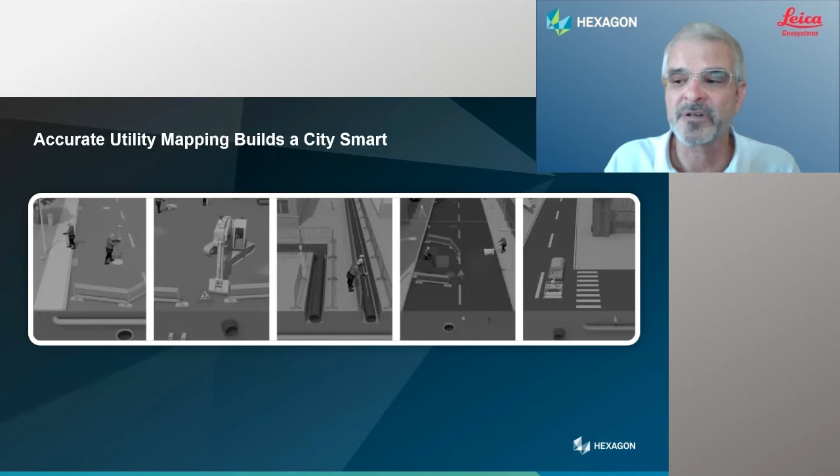So when we look at a smart city — what is a smart city? Contrary to what it may sound like, it's not a bunch of people with high IQs living in the same location. It's deeper than that. It's using the technology we have and sharing that technology. We may have the technology, we may be able to piece together this information about what is lying below the ground, but it's not until we start sharing that information with the general public or a developing city that we start making the city smart and using that data in a good way.

So we might use a tool like an EM tool, going around tracing a line in the ground and putting together this information, but turning it into useful information that can be used later.

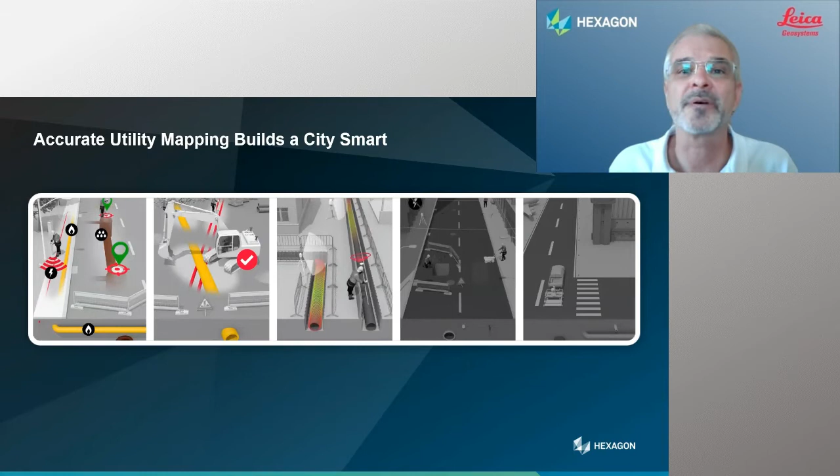And this is part about developing the city. It's also part about making a safe construction site when we can use these tools to identify what's in the ground, what's below the ground. Before we break the ground open, we know where and where we shouldn't be with the digging tool, with the excavator, so we don't have any issues here, because they can hurt us. It's also when we have an open trench, for example, before we bury the pipe, there are tools that we can use with our portfolio, with Hexagon. We can do above and below ground mapping. You combine this together and you know what's there before you close it up, so that you can build this map as you go and use it in the future.

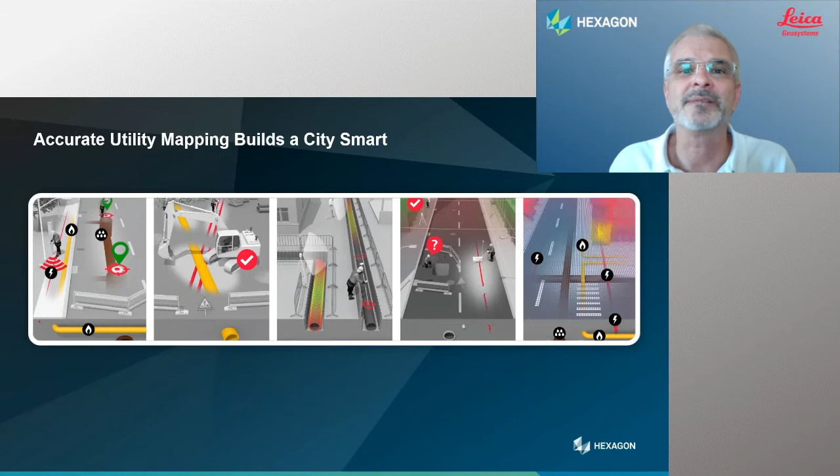Or if we're in an urban area and we want to see what's there, a number of tools can be used to combine this information together and develop something that we can use later on. And the other thing, it's developing so fast, and we'll show this to you a little bit later, but we also have the technology that can gather this information at speed. So when we're talking 35 miles per hour up to 90 miles per hour, you're capturing data this fast and processing it, back processing, but it's now faster than ever to use again. So this adds to the smart city that we are talking about, and it's then using this information to go forward to help develop that city.

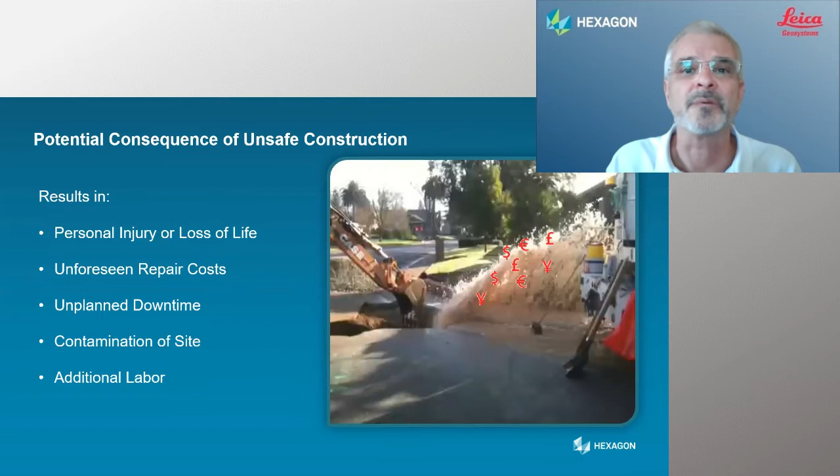So when we start talking about the tools that we have and how we can combine them together to make something safer, we can do that by combining a couple things here. So we now have an electromagnetic locator going through, looking for things in the ground, and we like to use this kind of workflow to combine the technology so that we don't leave anything missed. No stone unturned. We can go through, mark some areas. We use a GPR to go through, cover that area, and it's picking up bits and pieces, and you link them together with a sensing position device or a sensor, GPS, if you will. You can start getting a complete picture of what's below the ground. And then you can start using that right away on site by analyzing this information, sending it over to the operator of that machine to help avoid any kind of injury at the site.

And this is where the accuracy comes in. This is why we need to have the tools to be accurate, to be spot on, centimeters, 5 centimeters, right on, so we know what's there and what we can avoid. And I'll turn this quickly over to Steve, because he's going to take over and give you a little more about accurate underground mapping and some of the tools and techniques that we use in this area. Steve, if you would like to try to take over, and I'll give you possession of the controls.

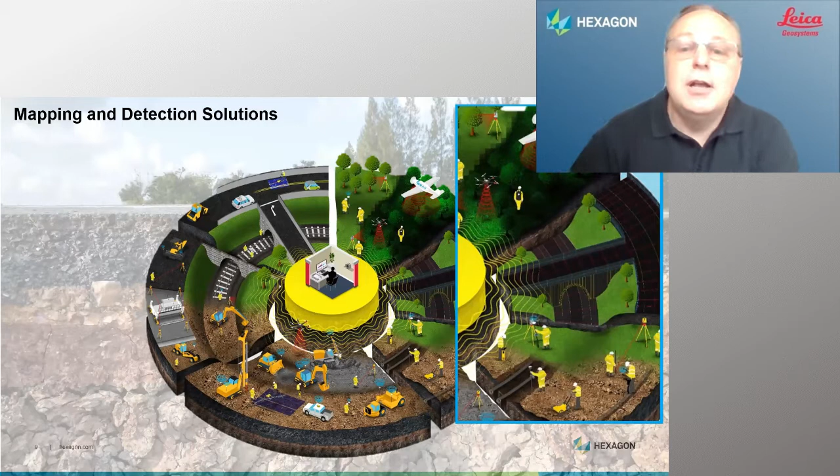This is a detection pie, and we use it in many of our presentations because it shows a complete picture of the available solutions that we have. From large-scale aerial photography to detecting buried infrastructure, from working within live construction sites, finding existing pipes and cables in the ground, and the things in between, which we call surveying. So whether these are below ground, above ground, or on the ground, Hexagon claim all three because these are things that are in our portfolio and part of our solutions.

So smart cities have as much, if not more, going on below ground than what we see, as opposed to the eye candy of the nice building. As Clint mentioned previously, to detect and map, we need to look out for these.

Leading on from Jeff, EML is electromagnetic locating, the process of locating using cable locating. You should all be familiar with these tools. But the reality is these machines find electromagnetic fields, predominantly found around pipes and cables. So we need to learn how to use the kit.

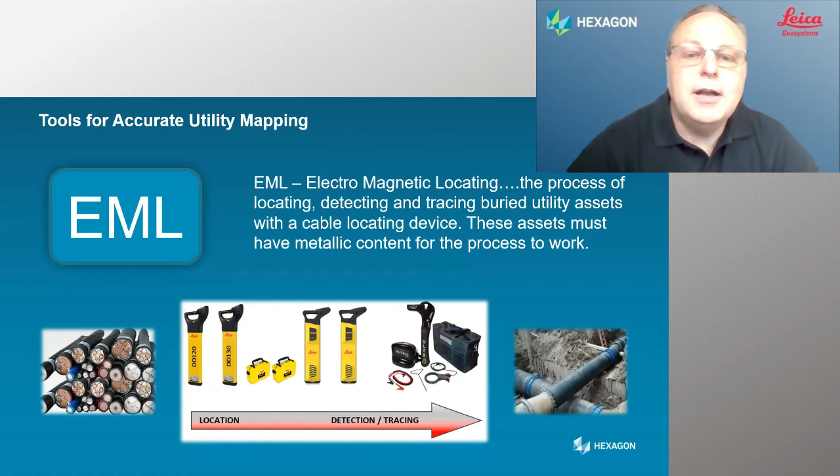GPR is a much more wide-ranging term. These are two terms that everybody uses, guys. We use GPR to describe one, a piece of equipment, and two, the actual technique for what we're doing - did we GPR the ground? This technology, GPR, is capable of detecting both metal and non-metallic objects, whereas EML is for metallic pipes and cables. It's up to us to gather the skill and knowledge to use it, unfortunately, as Jeff touched on.

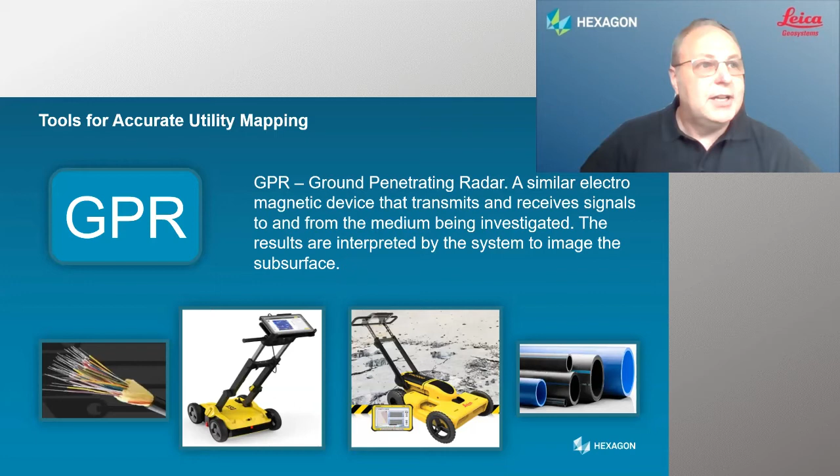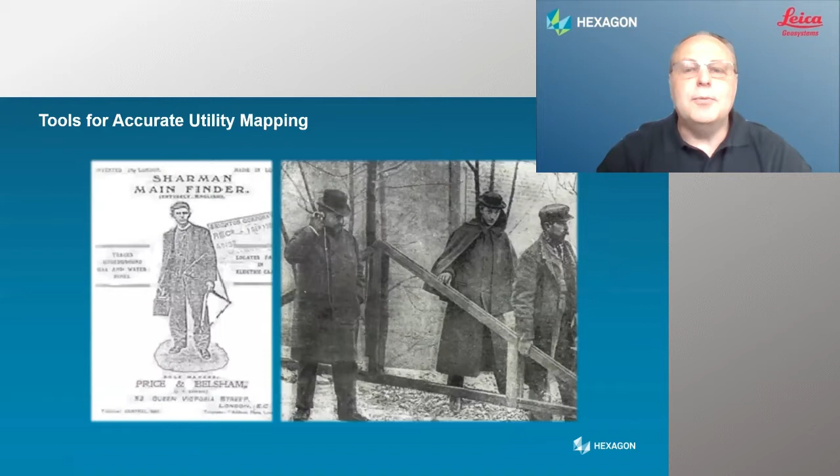So with those two out of the way, for anyone involved in the detection of buried assets, EML and GPR are the go-to tools - a little description on the screen there of what we've got. They've both been around for a long time, EML for around about 100 years, a little bit more, but the operating principles and theory of how and why they work really haven't changed. That's why we see old and new equipment models being used on work side by side.

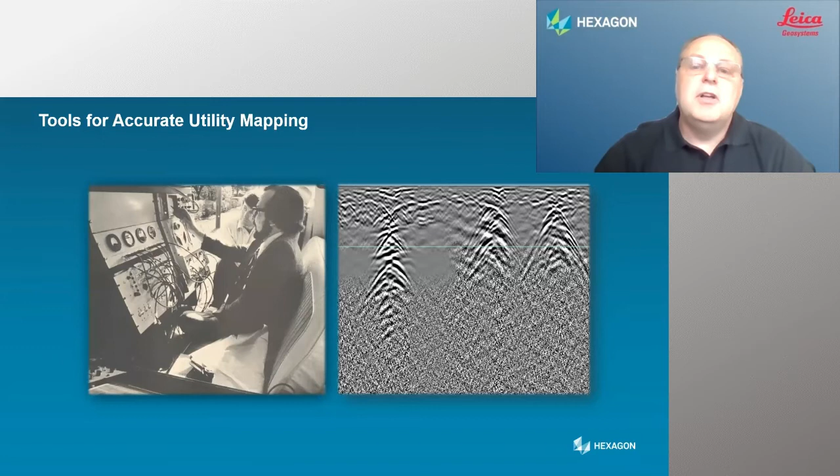They come in various shapes and sizes. On screen at the minute is the original GSSI radar, van-based, and some traditional radar data. Both are capable of collecting real-time, centimetre accurate positioning - not something just loosely mapped in satellite imagery with an accuracy that is really not good enough when we have to break ground.

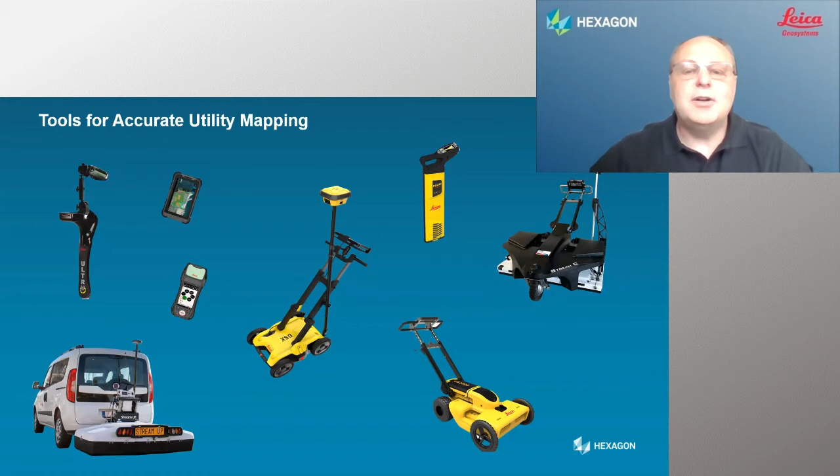Most people know about and are aware of cable locators nowadays, and their importance within the construction world. Not only for being able to find things, which is their primary function, but equally, and more than that, is safety - to keep people safe. GPR follows suit, and it should be used that way, preferably in conjunction with an EML device.

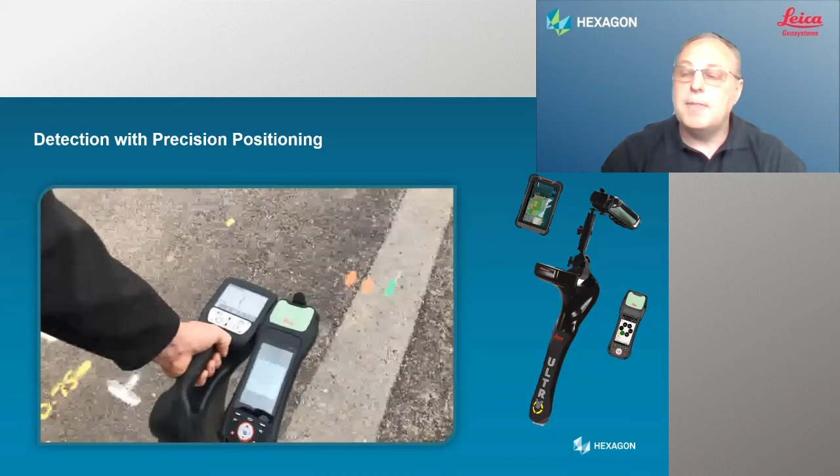For me, the site workflow starts with a locator. Naturally, existing pipe and cable record plans would come first, but they aren't always available, and neither is an 811 locator. As we know, there are many manufacturers of locators, all shapes, all sizes, and all colours, but they all do the same thing.

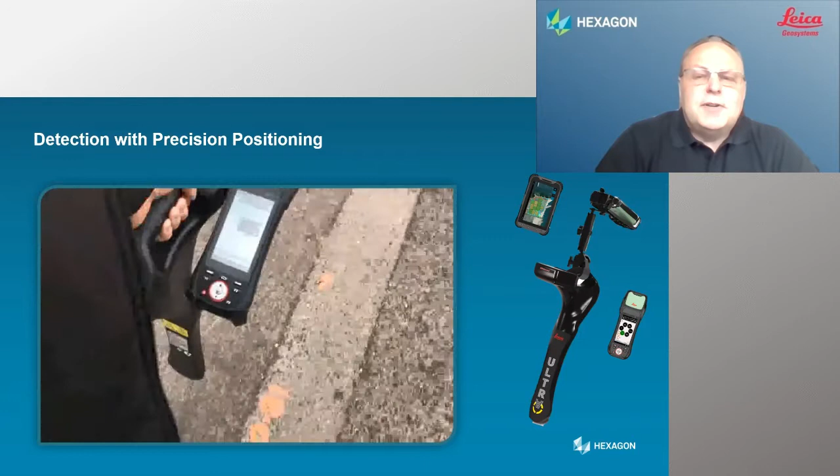For more complicated locates and in-depth surveys, we use a precision locator system, and with a little help from a GIS data collector, like on screen now, GPS centimetre accurate data is possible. On the screen, I was collecting to less than 5 centimetres accuracy when I was doing this. We currently use a modular system, as we know one size doesn't fit all in the locating world. So this type of system lets other manufacturers and users who want the ease and simplicity of RTK detection come to the party too.

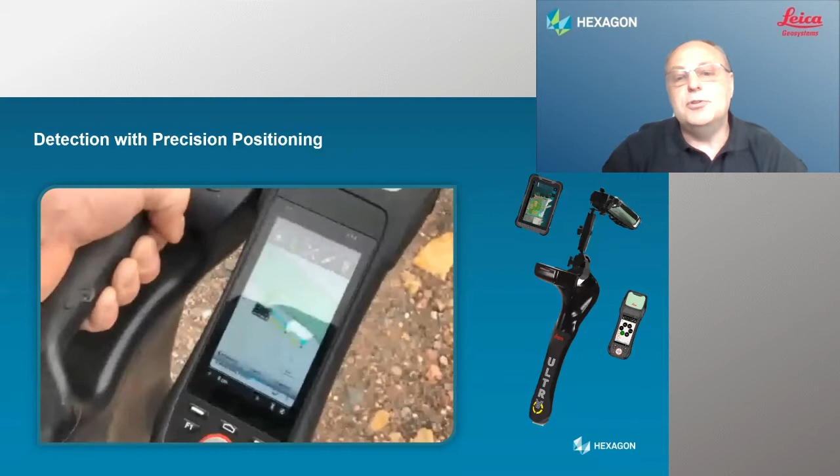This is a bolt-on system, guys - a simple pairing of devices, a small setup, and away we go. The system you see here is in the process of a simpler, smarter, more efficient revision, with a totally new solution coming very soon, so I advise you to keep your eyes open for it.

It'll be good. Output from the mapping app goes into the GIS platform, ArcGIS, where simple data conversion allows exports to the CAD modeling world with 3D attributes. So we mustn't forget that locator ranges, with all the usual accessories, are as important as the key components themselves, the transmitter and the receiver. We can add these accessories to the variety of tasks to make 3D data capture more accessible to everyone.

If we use EML, it's the ideal partner to any GPR task - it's a Batman and Robin, if you like, of the detection tag team. And it should be used that way, as a partnership.

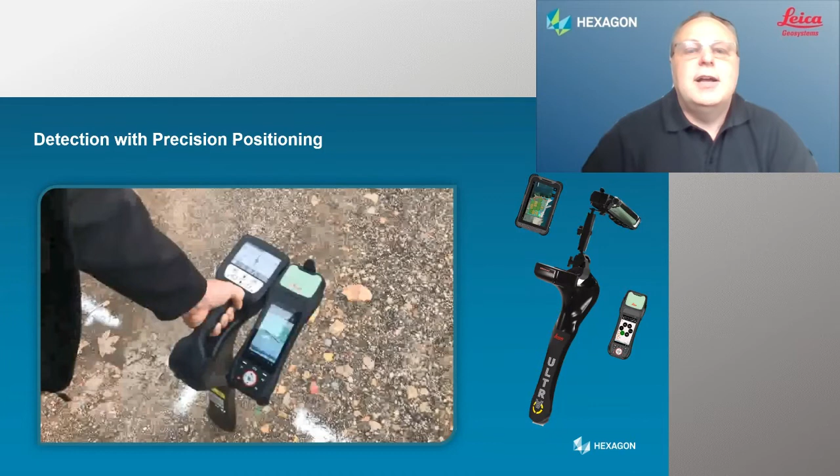I've been lucky enough to be involved in the DSX project, if this video will run okay. I've even had my own Hollywood moment in this video.

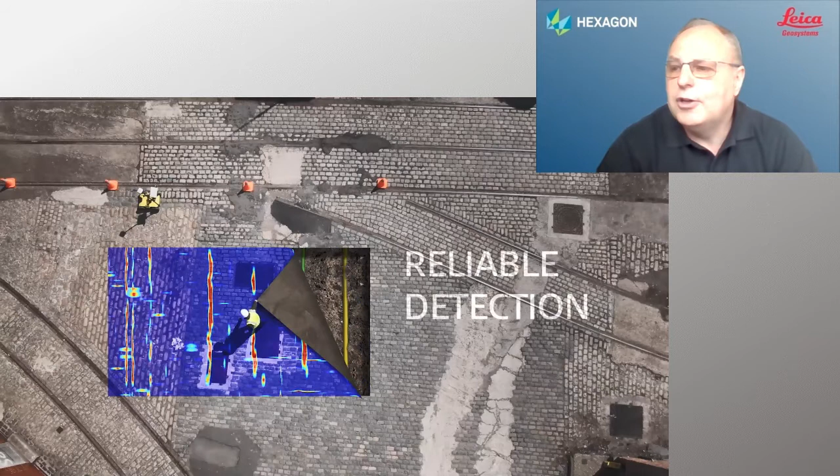This handcart system, with its all new software, is intuitive and now available. This means previous non-GPR or less experienced users can now get into the equipment and use it with relative ease and accessibility than ever before. Peeling back the layers and trying to democratize, if we want to use that word, the accessibility and availability of GPR. Take it away from, not take it away, but make it less non-expert.

I've used this system, I've used GPR for 20 years, guys. It's quite simple to use, does things very nicely.

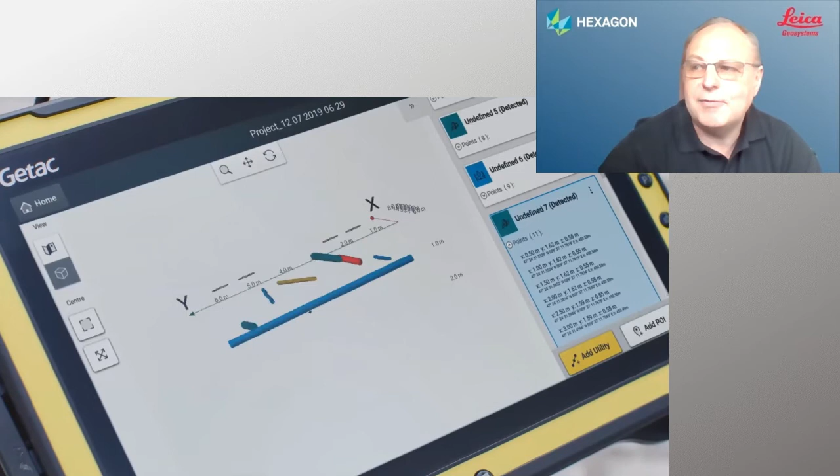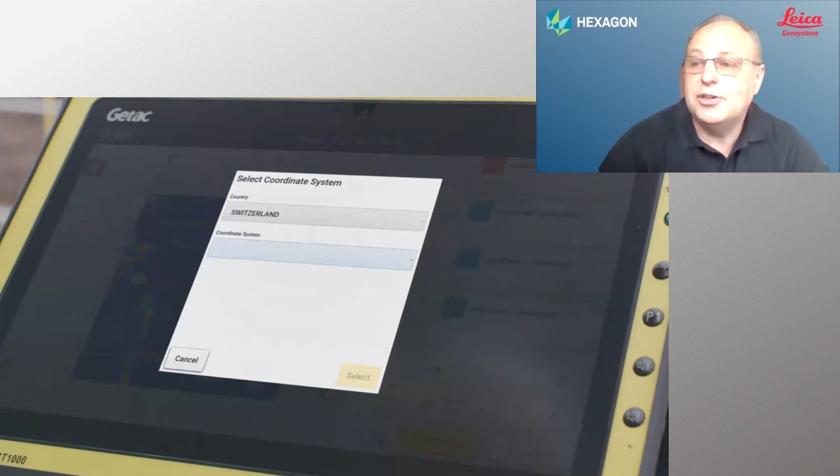As you can see on screen, we can get live 3D cube data. The machine and software do it all for us. The only thing we have to do is simply select the target, which is shown in high amplitude on screen. We can set coordinates to export. We can use it on any type of surface. As long as the wheels go around, that's us collecting data.

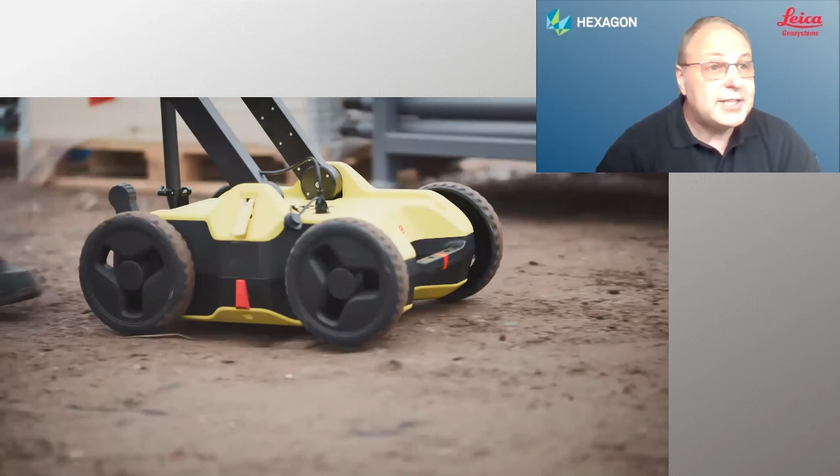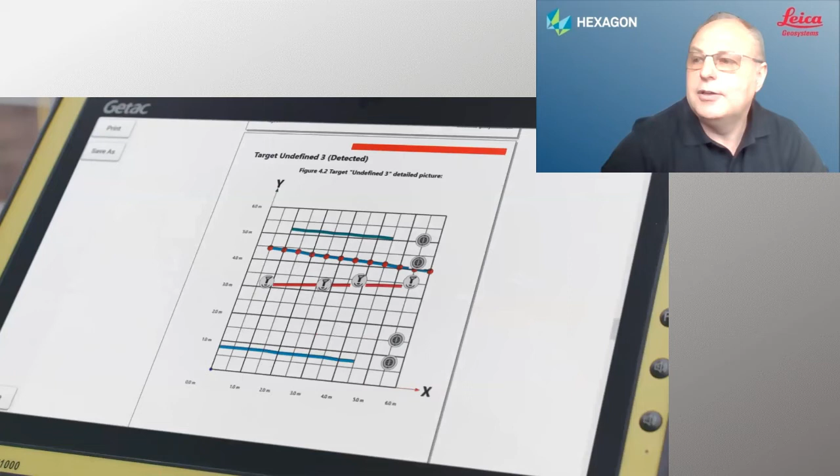We have onboard, on-site reporting: simple, planimetric, or data analysis. We can peel back the layers for any kind of construction.

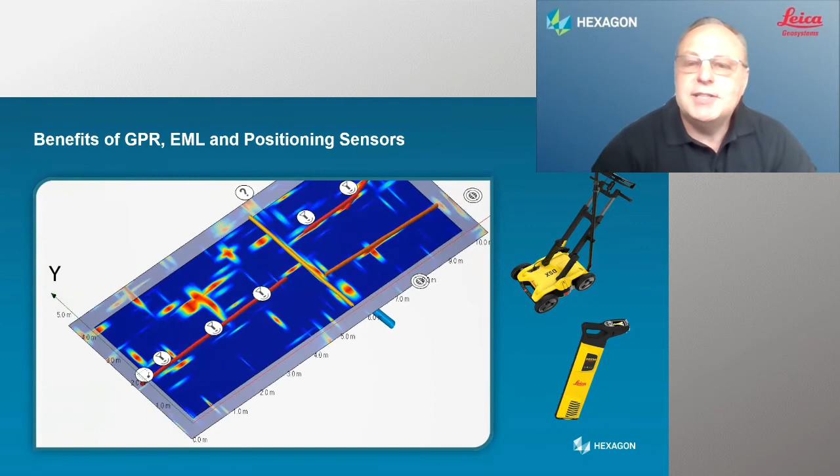So, ground penetrating radar, or GPR, or if you want to call it the dark art, it's always been a tricky process to pitch to the construction world. Thought of as overcomplicated and difficult to understand. Well, things are changing. They've changed already.

Traditional view of GPR data is replaced with a top-down view and slices through the ground. The unique operating software allows you to position EML detections within the data you collect on site. You can easily assign the correct depth elevation for the EML device, and for the first time on site, combined EML and GPR data come together in the same 3D live cube.

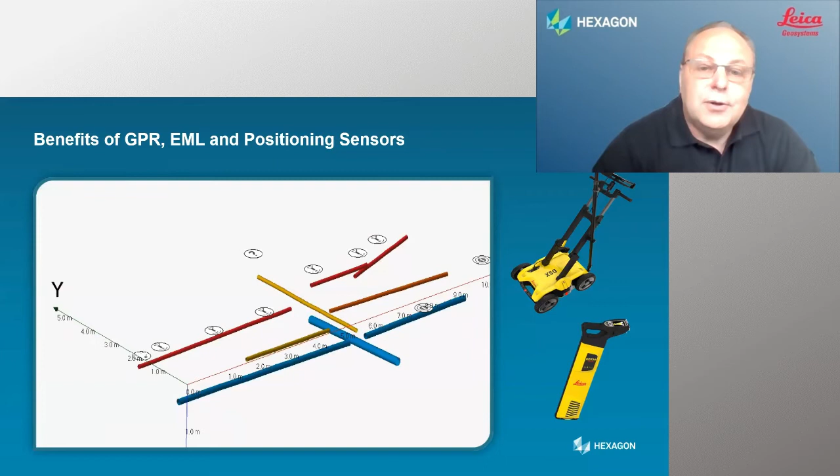This ability, with the intuitive and powerful detection algorithm for target analysis, gives the DSX the edge for simple efficiency. Add to this a GPS sensor for positioning, then all the data, including the EML information, inherits a true centimeter XYZ position. When used with the correction service, all available live on the worksite for the first time. The first time we'll see it in collection software, to be honest.

Other systems in the portfolio, Handcart Range, have a more traditional approach to how they do things, as you can see on screen. But the same applies, and you can still record everything on site, including EML, and assign true centimeter XYZ precision into targets, TPS, total station, or GPS.

GPS surveying, you just have to know how to get the best out of it. Sorry guys, but I'm a trainer, and that's what I have to say.

The multi-array antenna systems are perfect for larger area coverage, while the handcarts tackle smaller and maybe less accessible areas. The latest array, Clint's already mentioned this, is the new kid on the block, because it is. It brings the latest signal processing techniques for high-speed highway data collection.

All systems have positioning available to them, and all have 3D export and post-processing capabilities. The combined efforts of EML and GPR together get the best results possible. We use them together. And software, well, that's the glue that binds all this together, as the industry moves forward, taking ever larger steps day by day.

So take DXplore as the latest example for acquisition software, trying to keep us away from the hard and difficult interpretation. With the innovative process of Hexagon, we're ensuring cross-divisional collaborations, cementing the path to the future. The goal is to create a one-stop solution where the equipment, its firmware, and the software all seamlessly integrate with each other - quicker, smarter, and with greater accuracy and efficiency than ever before. Let's call it total mapping, if you like.

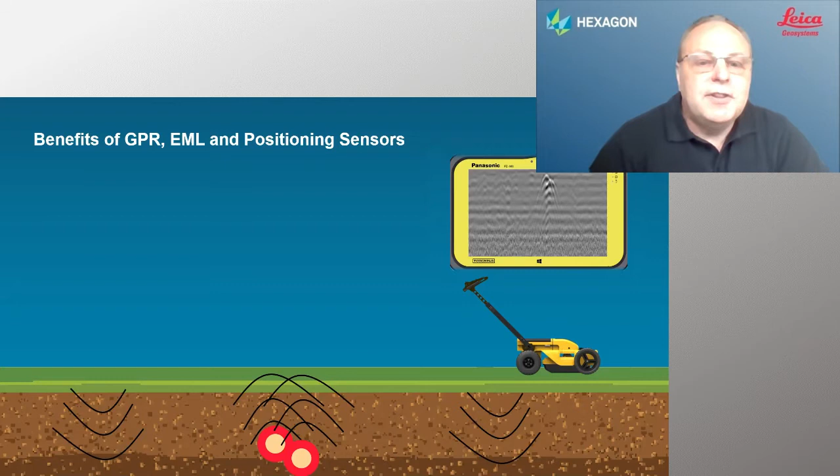So we have a lot of information so far. What I'd like to show you now is just a few of the case studies we have, using multiple different types of tools for mapping or detecting what's underground. Some of these cases are from the US, some from other parts of the world, but I think they paint a pretty good picture of how we can use these tools and this equipment to bring the unseen world to our fingertips, so we can have a better picture of what we have below.

A lot of sites don't have complete information. They may not have dated or up-to-date information, and you need to start putting the puzzle together before you dig, before you go into the ground, to see what just needs to be added to it.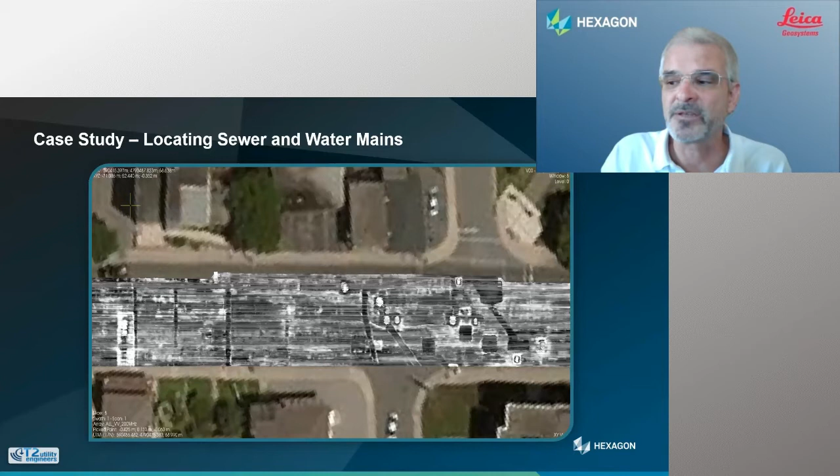So what they did is use a couple passes here to help identify some of the sewer lines or water lines in the ground to identify their locations. But then they also used EM to go through and identify some of the other utilities here in blue, red, and green, and overlaid them now on top of a single map so they could see the whole picture. I say now the whole picture because in this image you see there are some areas where the radar was strong, some areas where the EM was strong, and it's not until you combine these two together that we have a complete picture, a complete image of what's in the ground.

This is what's important here: we start getting a complete image, processing all this data and adding it together to give us a better view. It's how we look at this data, or how we want to use it to our advantage when we do future development or future studies. And it depends on what equipment you have, it depends on the software you're using. When you start collecting this data, it starts to add up, it starts to accumulate—you have a lot of data.

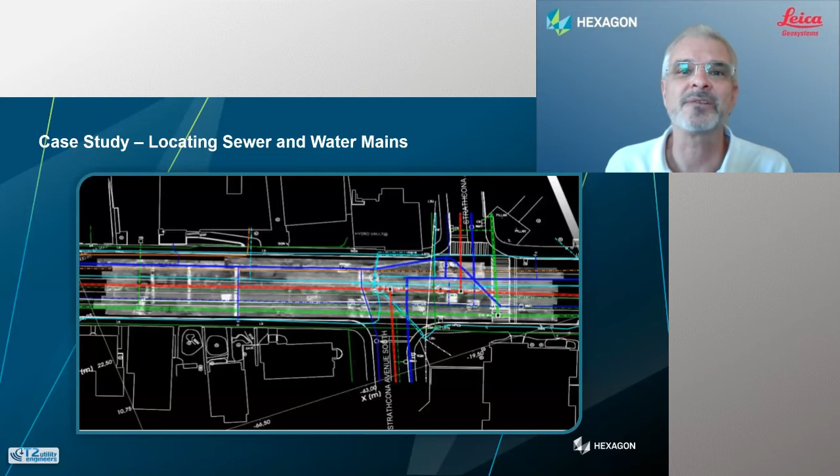One of the examples I want to show you now is one of the systems we've just released. It's not too long on the block here, and this is a Stream UP. It's something I'm sure Gavin is very familiar with, but we're starting to use the software here to make a complete picture. So if we look at an image here, when we start this video, we can see how this information is loaded, how it's starting to be pulled together so we can use it to our advantage.

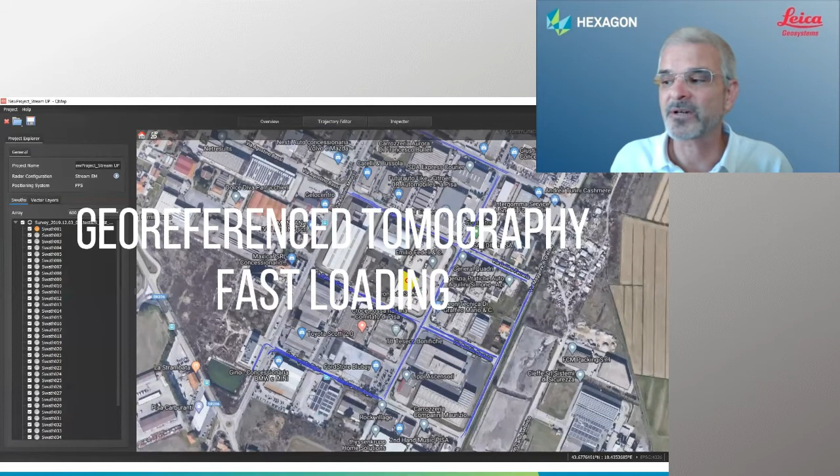So if we think about loading up a project that you'd maybe have to do back office, and you're starting to process the information, you can do this much quicker now with the right software, with the tools we're developing, to go ahead and start loading up an area of interest to where you want to see or combine what's above the ground with what's below the ground.

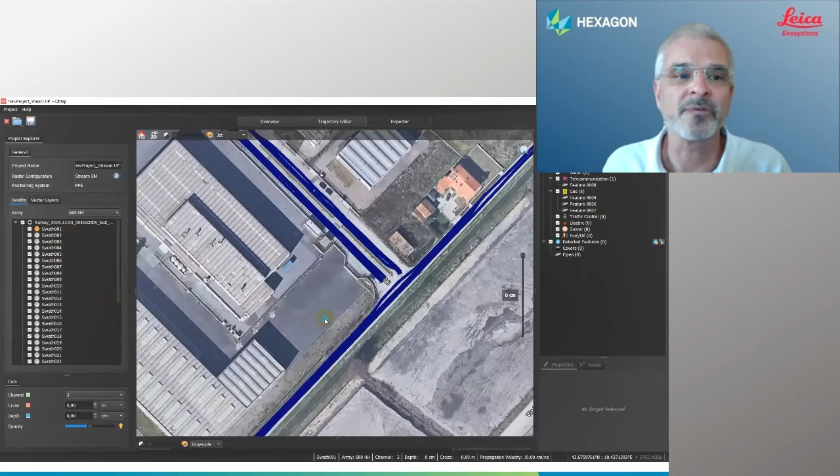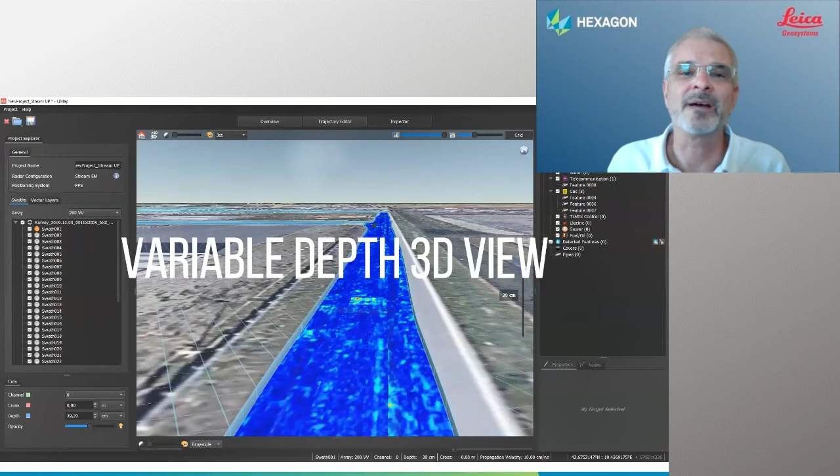In this example, you can see what we're finding in an area of interest. We're using the radar data that we collected, and I'll go again with the note that Jeff mentioned: we are doing some of this data collection at speed. This unit can go up to 35 miles per hour, which is what's recommended, but you can go up to 90 miles per hour and still create this information. You can create this 3D image to where you can now look at the data in a different way, something that's easier for us to visualize over vast areas.

This is a lot of information, and it's being processed at much faster speeds than we had before. This helps us get the answers we need in shorter time, to be more efficient and more complete with the data we're using.

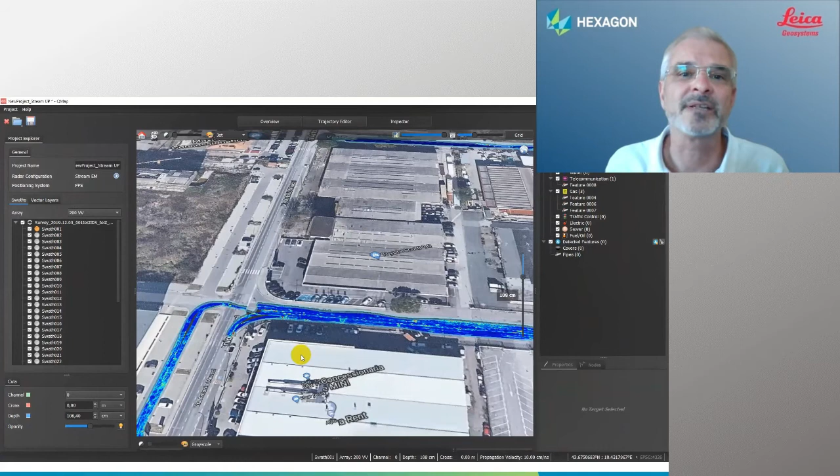These are the kind of tools we like to use. They're looking for utilities in this case, but the tools aren't just for utilities. It's for finding what's not there, or what's there that we don't see, that's not part of the utility, not even on a map.

When we look at the big picture, this is where this information really comes in, something we've alluded to already in today's presentation. You've got to be responsible for what's on the site, not only above ground, but on or below the ground.

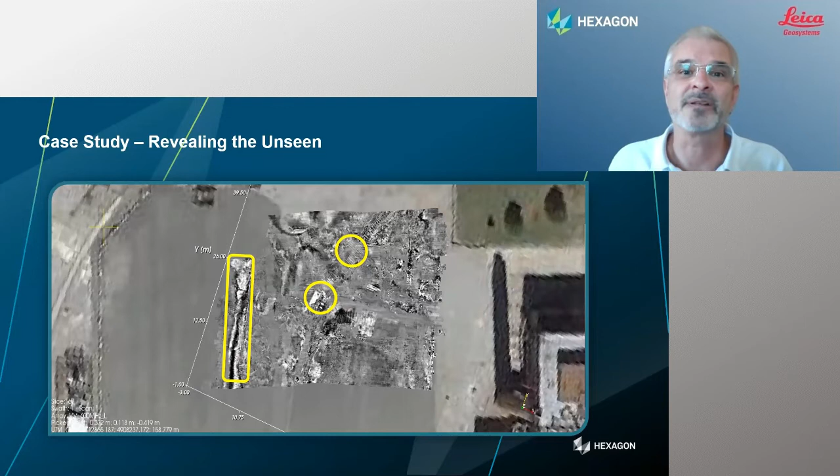When we look at it this way, you want to know what's below the ground before you invest in this piece of property or this ground, so you can have an idea of what you may be dealing with. You might want to find things out beforehand rather than later, and this makes a big difference.

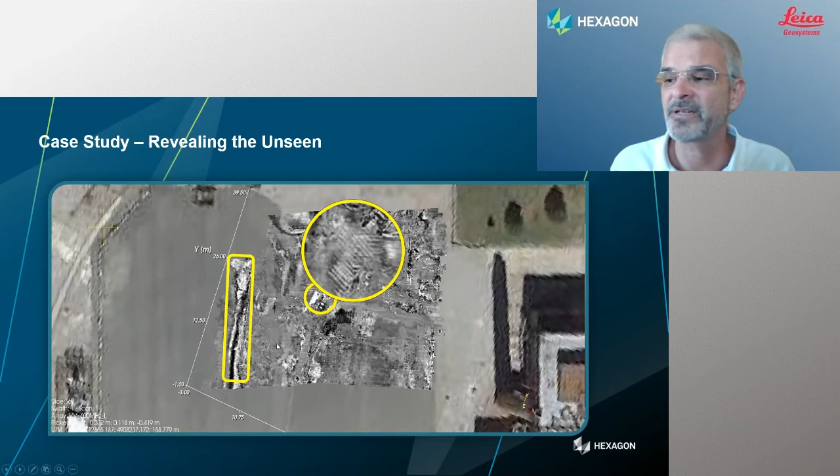Let me turn the screen to the right screen, how to do this again. You can see parts of the information here, but not all of it.

In this example, we used a push cart GPR mounted system with a GPS locator, combining positioning and radar to complete the picture. We're doing a pseudo array, a pseudo matrix, scanning to get the information we needed to see what's in the ground before going any further.

So when we start building this transformer station, we have the information we need. Again, this is combining tools, combining the things we need to get accurate mapping of what we want to see before we go any further.

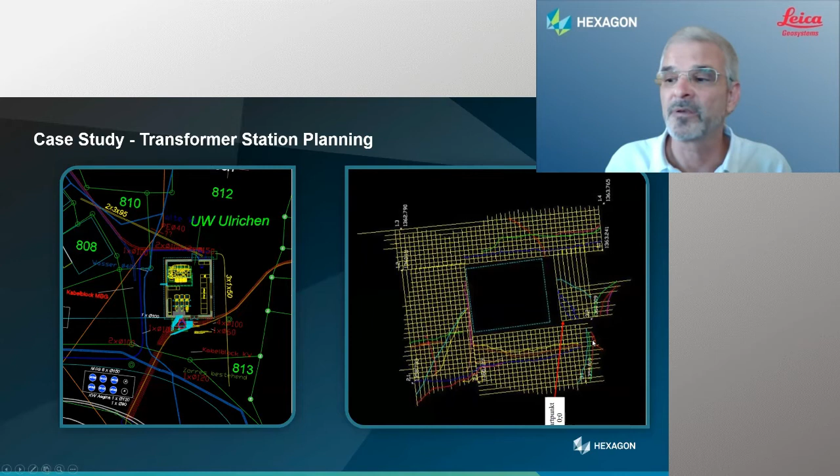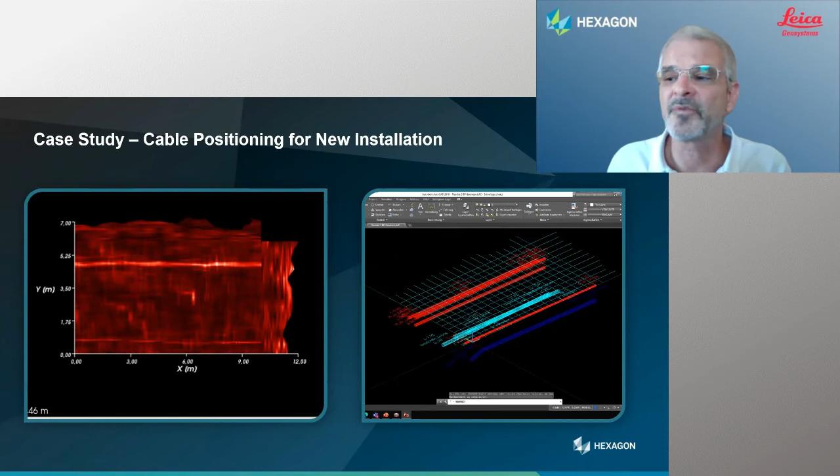As we move forward into different ways, we can think about how to see this data differently. It's all about visualization, maybe looking at the data by a flyby, so we can map everything in detail, look at it from above, below, from the side, and get a good idea of what's there and how accurate our maps are.

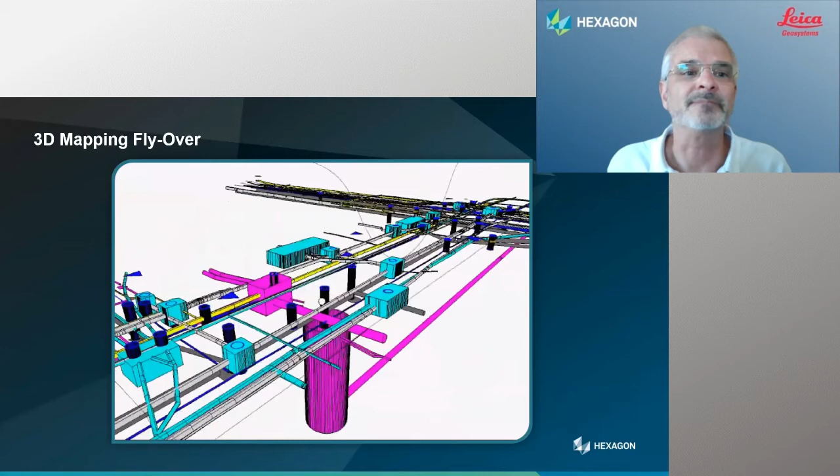When we do this kind of flyby, you might be able to see areas where the data is missing or incomplete, and you can also find tools to help you complete this data even better than before.

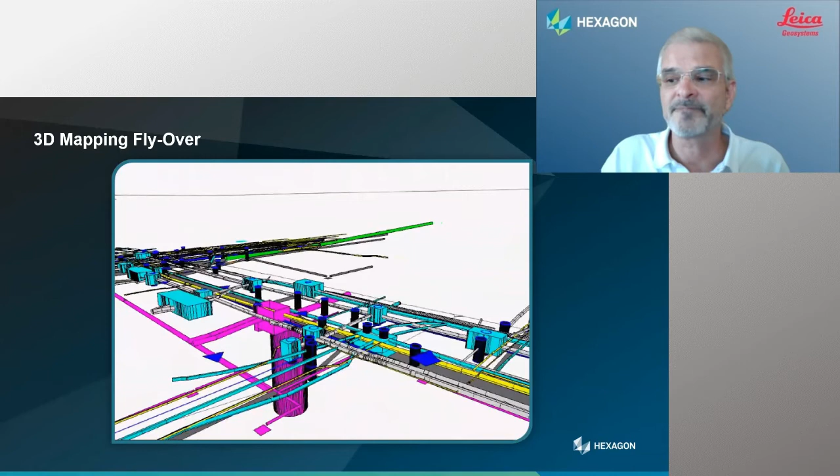So it's like a big puzzle that you're piecing together, these technologies, these tools, this equipment, and getting a better picture for it and getting what you need to help you become more safe and smarter with your future.

When I talk about future, what is the future? We've touched on this already, but it's an amazing prospect, because now we're having technology and information coming in from all sorts of different channels, all sorts of different tools and equipment, now integrated through a common glue software where it's picking the information and filling up the gaps we might have at a site, a construction area, what have you. We use this information, and we see the future as this happening more and more.

We've already alluded to that. We have information from GIS, ArcGIS, we have machine control information. All this is being used to help us be more efficient, more safe, more productive. When we start seeing this information pulled together, this is where I feel we have a good advantage at Hexagon, because we can bring this information together from all perspectives, above the ground, under the ground, and on the ground.

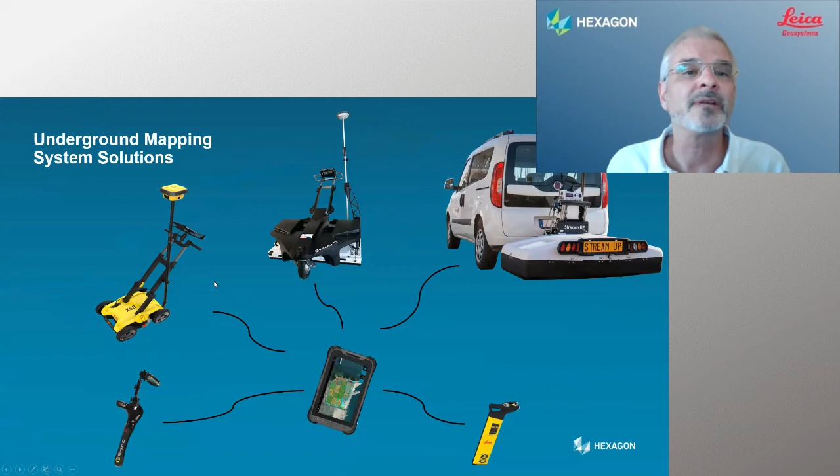Maybe you're walking down to a job site wearing virtual glasses, and you can actually see the pipes in the ground. You don't even need a handheld device anymore. You know that it's 3 meters or 6 meters, or feet, down below you, underneath your feet, what's there and what kind of utility it is.

The future is going to be an amazing spot here, and we're going to play a fantastic role in developing tools that integrate with each other, and hopefully we can get past some of the barriers to sharing information with other people so we can learn and help save lives later with this information. These are the kind of things we want to be a part of, the kind of things we want to contribute to. I see the future doing something just like this as we go forward, and it's going to play a critical role in it.

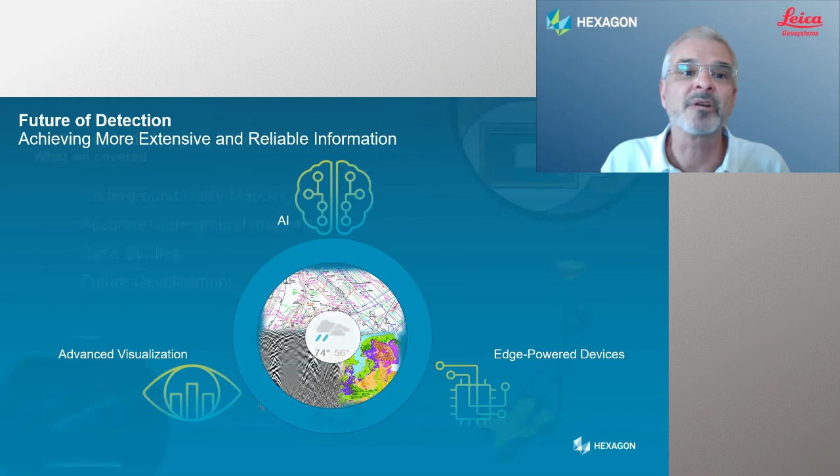So what did we talk about? We have a fantastic session here, an exciting day. Our part of it is just a tip in the whole picture, but it's a fantastic part to be a part of.

Underground mapping is just beginning to really take in, and it's really beginning to see, hey, this is something we should be a really good part of, and we need to be active doing this. We need to be part of that smart city, part of that safe construction site, and put that at the top of our list, use that information, share that information to develop and have these safe construction sites. We need to have the accuracy.

This is extremely important when we want safe sites and information in the ground properly located. Exact locations, or very close locations, play a critical role in this. And of course, the case studies, which you'll hear today from us and maybe more in the sessions today, show how this information is being combined to give you a better picture of the whole site, and how that information is being used.

And finally, the development of it going forward, how we start integrating information from outside. So maybe you've collected a site and pulled in information about the weather on that particular day - you know it was rainy or cold. Maybe the soil is clay, maybe the soil is sand at that location, and you can use that before you even go out to the site to help you be more efficient, more productive. These are the kind of things of the future, the kind of things we see moving forward, and we want to be a part of it.